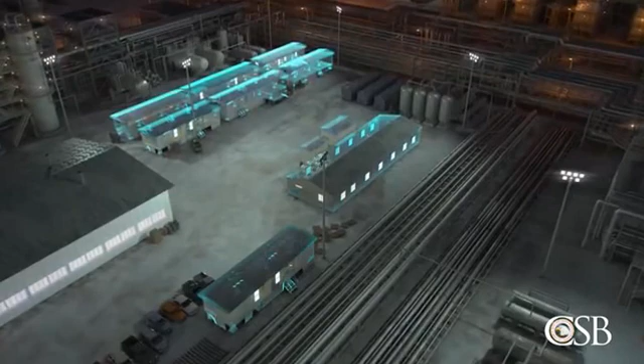BP had positioned a number of portable trailers close to process units for the use of contractors and other maintenance workers. Over a period of months, BP had located 10 trailers for workers servicing the Ultra Cracker unit, including a double-wide wood-framed trailer that contained 11 offices and was regularly used for meetings. Though these trailers were located near the isomerization unit, the occupants were not warned the ISOM unit was about to start up, a potentially hazardous operation.

At 2:15 a.m. on March 23rd, overnight operators began introducing flammable liquid hydrocarbons, known as raffinate, into a 170-foot-tall raffinate splitter tower used to distill and separate gasoline components.

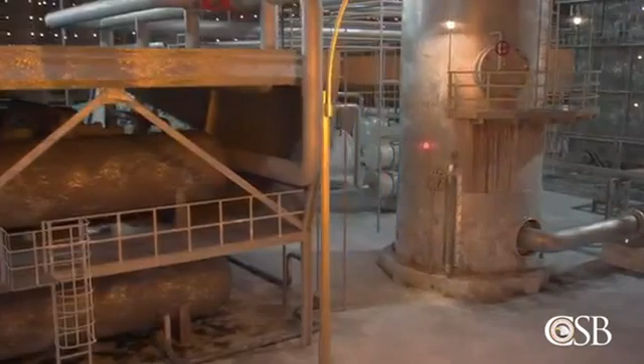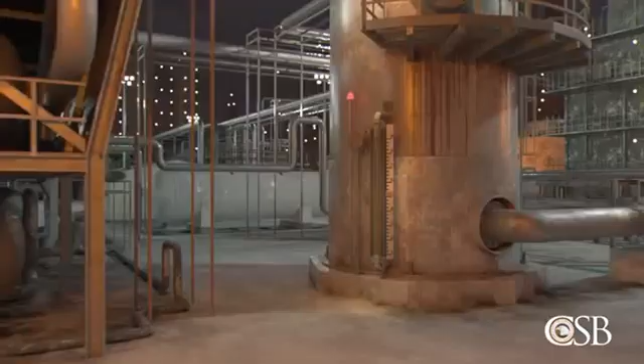Near the base of the tower, there was a single instrument that measured how much liquid was inside. It transmitted this information to both a satellite control room and a central control room located away from the ISOM unit. But this level indicator was not designed to measure liquid above the 9-foot mark. During normal operation, the tower was only supposed to contain about 6½ feet of liquid.

But during startups, operators routinely deviated from written procedures and filled the tower above the 9-foot mark, concerned that if the liquid level fluctuated too low, it would cause costly damage to the furnace.

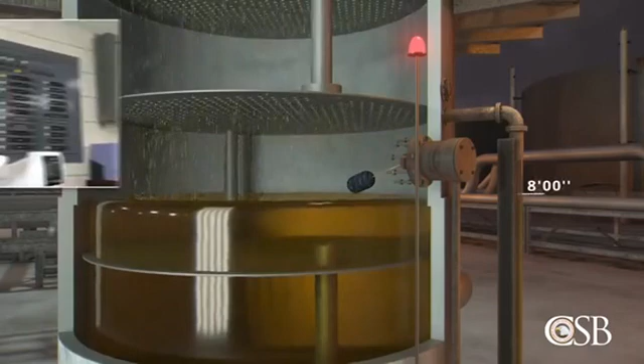At 3:09 a.m., as the liquid neared the 8-foot mark, a high-level alarm activated and sounded in the control rooms. But a second high-level alarm, slightly further up the tower, failed to go off.

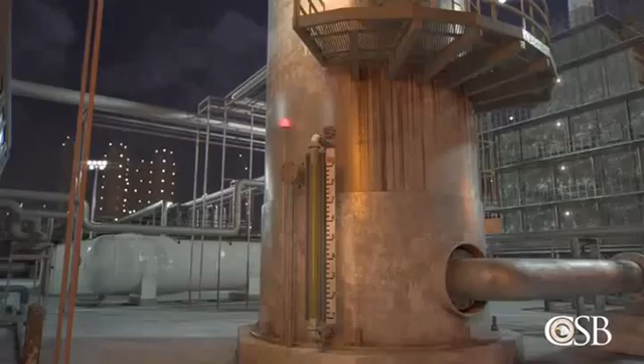By 3:30 a.m., the level indicator showed that liquid had filled the bottom 9 feet of the tower and the feed was stopped. The CSB later estimated that the liquid was in fact at a height of 13 feet, but operators could not know the actual level because the indicator only measured up to 9 feet.

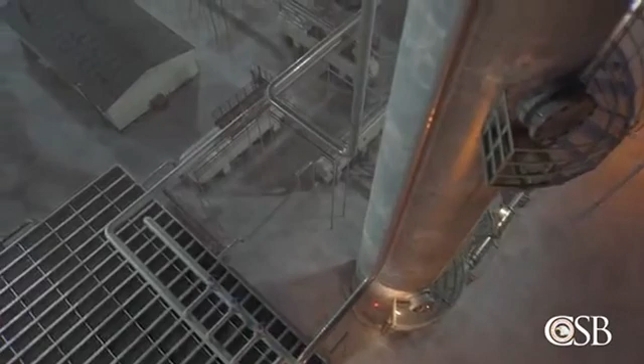The lead operator had been overseeing the startup from a satellite control room within the ISOM unit. At 5 a.m., he briefly updated the night board operator in the central control room about the startup activities. The lead operator then left the refinery early, an hour before the end of the shift.

A new board operator arrived in the control room around 6 a.m. to start his 30th day in a row working a 12-hour shift. He spoke briefly with the departing night shift operator and then read the logbook to prepare for the startup.

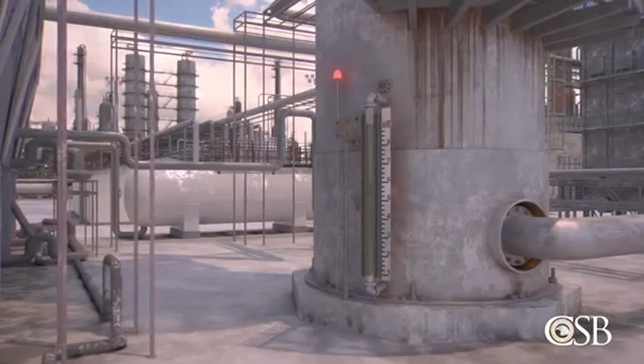But the logbook did not clearly indicate how much liquid was already in the tower and equipment, and it left no instructions on routing of the liquid feed and products when the startup resumed. Instead, the control board operator only found a one-line logbook entry that said ISOM brought in some RAF to unit to pack RAF with. At 7:15 a.m., the day shift supervisor arrived.

Because he was more than an hour late, he received no formal briefing from personnel on the night shift about conditions in the ISOM unit.

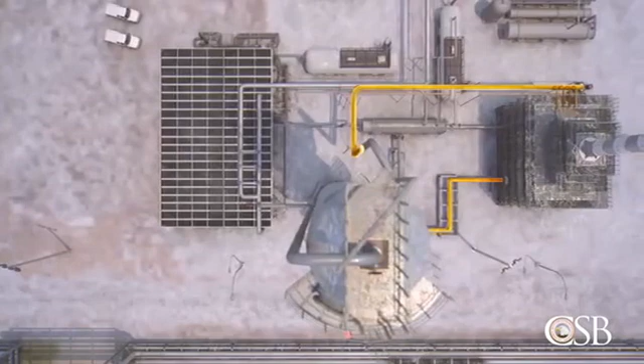At 9:51 a.m., operators resumed the startup. They began recirculating the liquid feed and adding more liquid to the already overfilled tower.

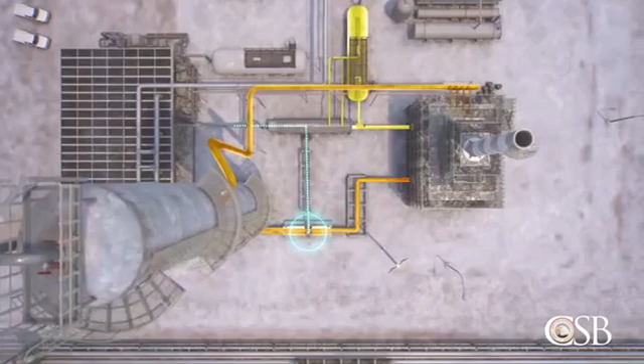As new feed was added, startup procedures called for regulating the liquid level in the tower using the automatic level control valve. But the board operator and others had received conflicting instructions on routing the product. As a result, this critical valve was left closed for several hours, blocking the flow of liquid from the tower.

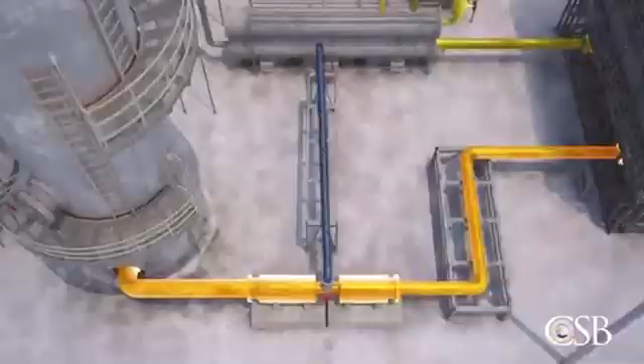A few minutes later, operators lit burners on the furnace to begin heating up the feed, part of the normal startup process. While the startup was underway, the day supervisor left the refinery on short notice, just before 11 a.m., to attend to a family medical emergency.

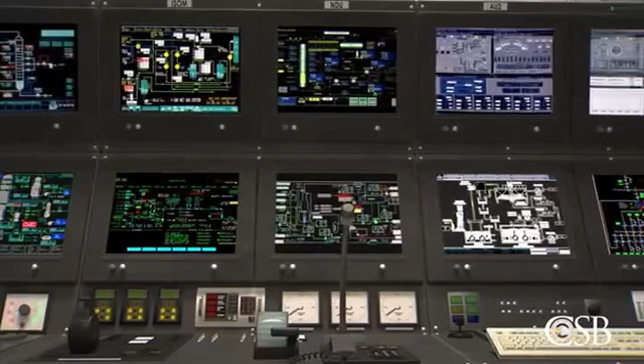Contrary to BP's own procedures, no experienced supervisor was assigned to replace him. This left a single control board operator, now without a qualified supervisor, to run 3 refinery units, including the ISOM unit, which needed close attention.

The refinery had eliminated a second board operator position following corporate budget cuts in 1999 after BP acquired Amoco.

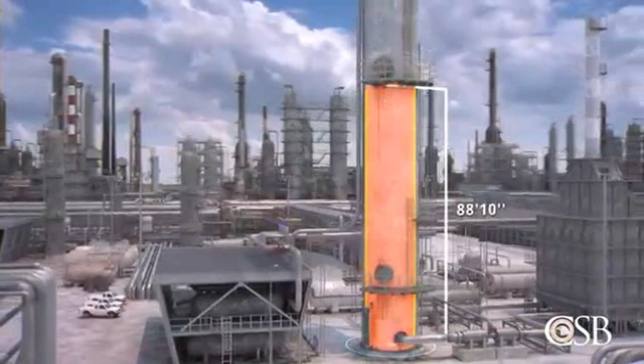As the startup continued, the tower steadily filled with liquid, reaching a height of 98 feet shortly before noon, more than 15 times the normal level. But the improperly calibrated level indicator told operators in the control room that the liquid was at 8.4 feet and gradually falling.

Furthermore, the control panel was not configured to clearly warn operators of the growing danger. It did not display flows into and out of the tower on the same screen, nor did it calculate the total liquid in the tower.

Meanwhile, the maintenance contractors, who were not involved in the operation of the ISOM unit, left their work trailers to attend a company lunch, celebrating a month without a lost time injury.

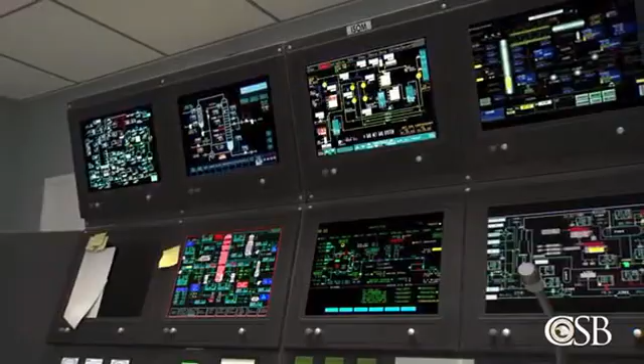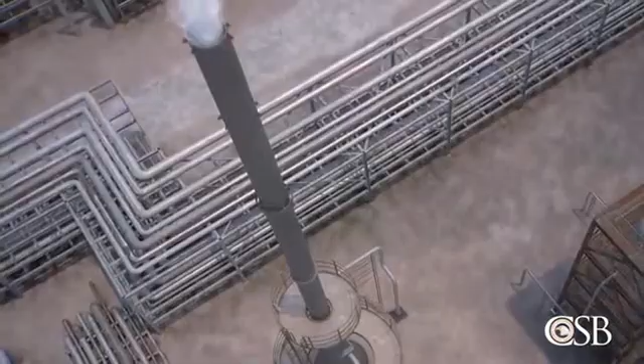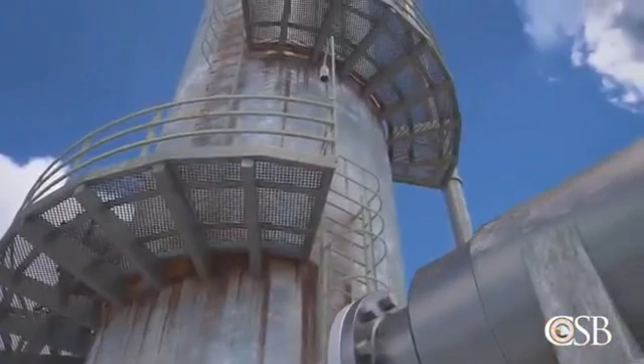At 12:41 p.m., an alarm activated as the rising liquid compressed the gases remaining in the top of the tower. Unable to understand the source of the high pressure, operators opened a manual chain valve to vent gases to the unit's emergency relief system, a 1950s-era blowdown drum that vented vapor directly into the atmosphere. Operators also turned off 2 burners in the furnace to lower the temperature inside the tower, believing this would reduce the pressure. Nobody knew the tower was dangerously full.

The operators did become concerned about the lack of flow out of the tower and began opening the valve to send liquid from the bottom of the tower to storage tanks. But this liquid was very hot. As it flowed through the heat exchanger, it suddenly raised the temperature of the liquid entering high up the tower by 141 degrees Fahrenheit. It was now about 1 p.m.

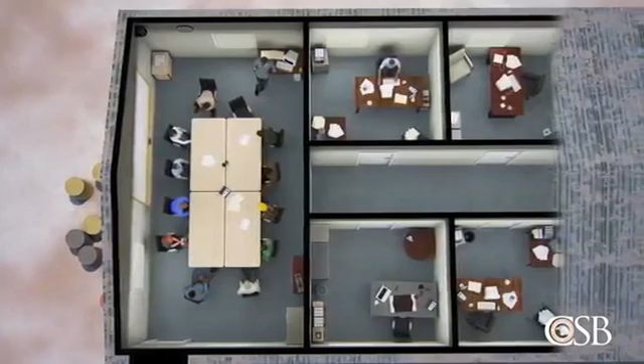Contract workers, unaware of the startup and the looming danger, returned from lunch and began a meeting in the double-wide trailer, in the corner room closest to the blowdown drum.

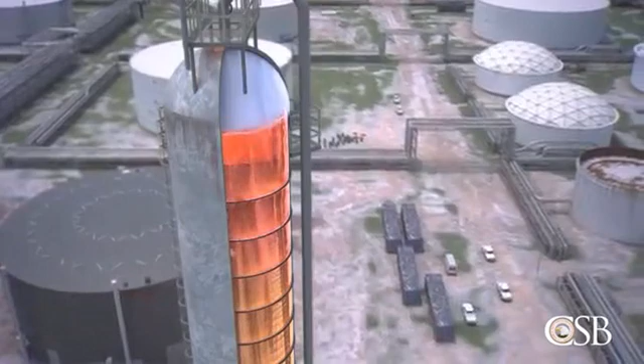Over the next few minutes, the hot feed entering the tower caused the liquid inside to start to boil and swell. Liquid filled the tower completely and began spilling into the overhead vapor line, exerting great pressure on the emergency relief valves 150 feet below.

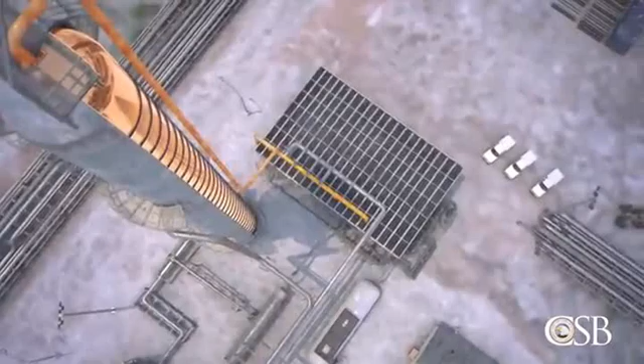At 1:14 p.m., the 3 emergency valves opened, sending nearly 52,000 gallons of flammable liquid to the blowdown drum at the other end of the ISOM unit. Liquid rose inside the blowdown drum and overflowed into a process sewer, setting off alarms in the control room. But the high-level alarm on the blowdown drum failed to go off. None of the operators knew of the catastrophe unfolding in the ISOM unit.

As flammable hydrocarbons overfilled the blowdown drum, operators nearby saw a geyser of liquid and vapor erupt from the top of the stack. The equivalent of nearly a tanker truck full of hot gasoline fell to the ground and began forming a huge flammable vapor cloud.

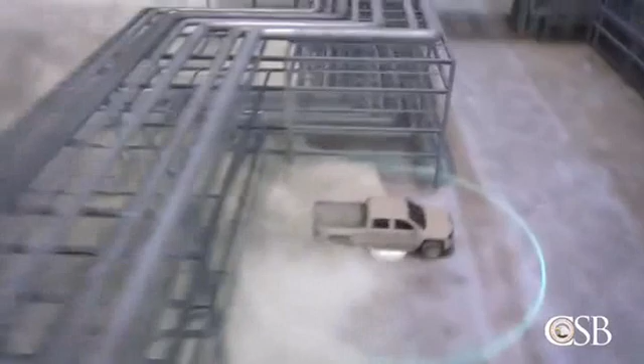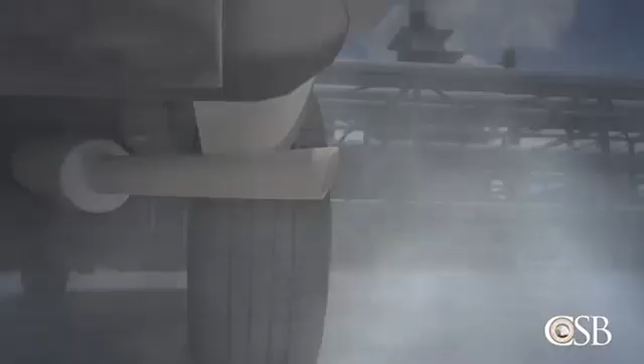The vapor cloud expanded in just 90 seconds, engulfing the unit and the nearby trailers full of workers. About 25 feet from the base of the blowdown drum, 2 workers were parked in a pickup truck with the engine idling. As flammable vapor entered the air intake, the diesel engine began to race. The 2 workers fled, unable to shut off the engine. Moments later, witnesses saw the truck backfire and ignite the vapor cloud.

Powerful explosions swept through the area. The blast pressure wave accelerated through the ISOM unit, causing heavy destruction and igniting fires. The workers inside the trailers were right in the path of the explosions. The fires continued to burn for hours.

12 of the 20 occupants of the double-wide trailer were killed, along with 3 workers in a trailer nearby. 180 workers were injured, many with serious burns, fractures, or other traumatic injuries. The wood and metal frame trailers were blown apart by the blasts. Firefighters struggled to rescue the injured and recover the victims. 50 large chemical storage tanks were damaged, and the ISOM unit remained shut down for more than 2 years.

The disaster at BP Texas City was the most serious refinery accident ever investigated by the CSB. CSB Supervisory Investigator Don Holmstrom led a 2-year investigation to determine the root causes of the accident. This investigation was the largest and most comprehensive investigation in the history of the Chemical Safety Board.

We interviewed over 370 witnesses. We looked at thousands of documents, literally millions of pages of documents, and we examined the plant, inspected over 40 pieces of instrumentation and equipment.

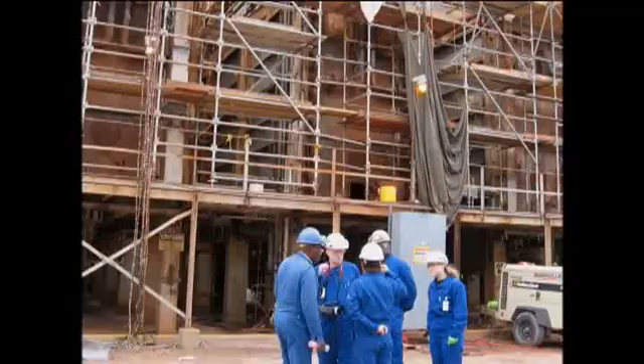The investigation team examined a wide range of safety systems, practices, and standards, and looked at human factors such as fatigue and communication between operators.

The tragedy at BP was the worst industrial accident in the United States in nearly 15 years. The CSB concluded that it was the result of organizational and safety deficiencies at all levels of the company. We found that BP management had, for many years, overlooked warning signs of a possible catastrophic accident.

There's an old saying that if you think safety is expensive, try an accident. Accidents cost a lot of money, and they're not only in damage to plant and in claims for injury, but also in the loss of the company's reputation.

The reason why the Texas City accident has such an impact is because when people look at it, they can see that they are all in the same boat, that the problems which led to that accident are likely to be present at other sites around the world.

During the early stages of our investigation, our team had noted there were multiple safety system deficiencies at the Texas City plant. We also found there was a history of fatalities at the plant.

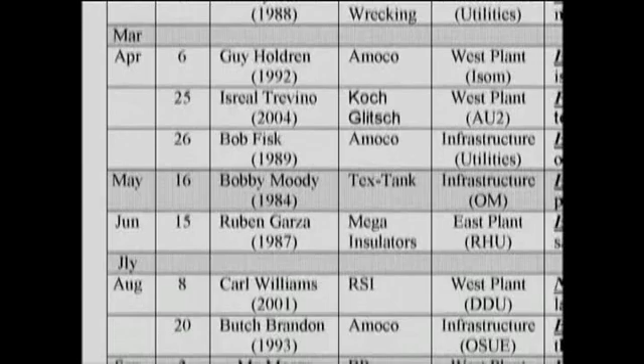Prior to the March 2005 accident, 23 people died in accidents over a 30-year period at the Texas City Refinery, beginning when it was owned by Amoco and continuing after BP acquired the refinery in 1999.

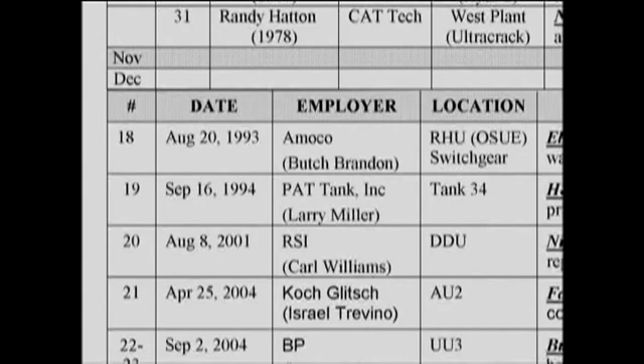The CSB wanted to know what the connection was between this history of fatal incidents and the organizational and cultural factors. BP Corporation's lack of focus on preventing major accidents allowed budget cuts to be made without assessing the impact on process safety. The CSB found that cost-cutting, production pressures, and failure to invest significantly impacted the process safety performance at the Texas City Refinery and left the refinery vulnerable to catastrophe.

After the merger with Amoco, BP ordered a 25% reduction in fixed costs at all its refineries. This impacted important process safety systems such as staffing, training, and mechanical integrity.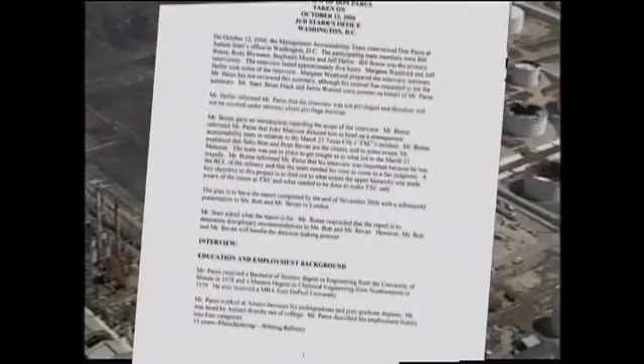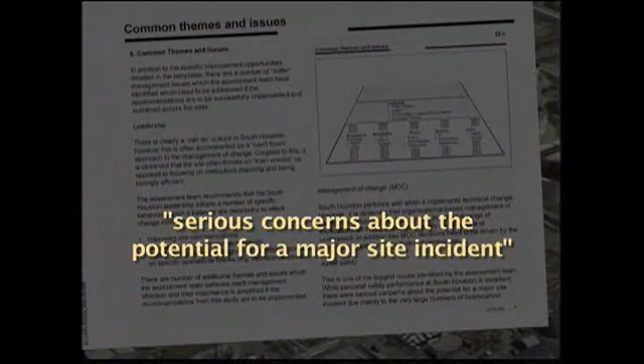The effects of the budget cuts became apparent in a number of internal BP documents made public following the accident. In one, the refinery manager was quoted as having observed in 2002 that the infrastructure at Texas City was in complete decline. He ordered a study of the refinery's safety and mechanical integrity, which was shown to BP executives in London. That study warned of serious concerns about the potential for a major site incident following more than 80 hydrocarbon releases in the previous 2 years.

The study also concluded that its own findings were urgent and far-reaching. A follow-up BP study in 2002 found the refinery's integrity and reliability issues were clearly linked to the reduction in maintenance spend over the last decade.

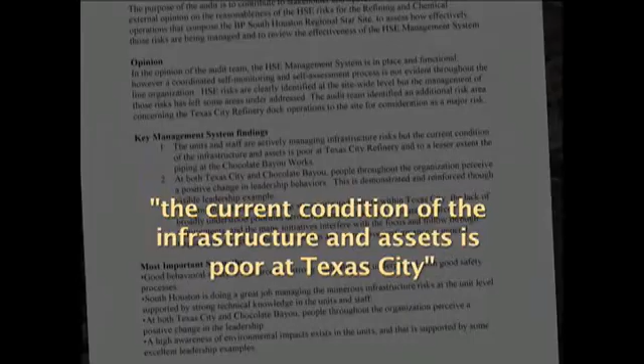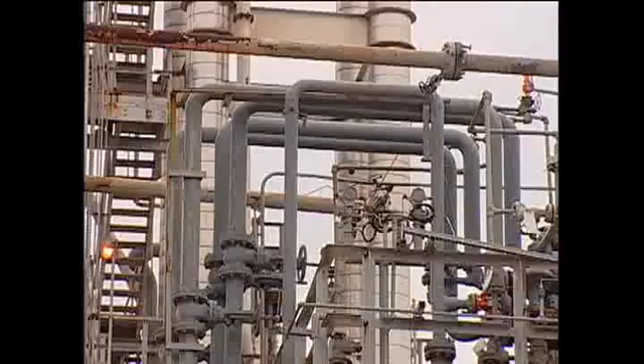In 2003, a maintenance assessment stated that cost-cutting measures have interfered with the group's work to get things right. Usually, reliability improvements are cut. Later that year, a company audit found the current condition of the infrastructure and assets is poor at Texas City, and that maintenance spending was limited by a checkbook mentality. Only the money on hand would be spent, rather than increasing the budget.

In March 2004, BP auditors in London concluded that 35 business units around the world, including the Texas City Refinery, suffered from a host of common safety problems, including widespread tolerance of non-compliance with basic HSE, or health, safety, and environmental rules, poor implementation of safety management systems, and lack of leadership competence and understanding.

There were a number of reports coming up as high as the board level that indicated serious problems throughout the BP system. During 2004, the Texas City Refinery had 3 major accidents, including a process unit fire that caused $30 million in damage. 2 other accidents in 2004 resulted in 3 fatalities. Yet this same year, the refinery had its lowest ever recordable injury rate, a statistic that does not include fatalities.

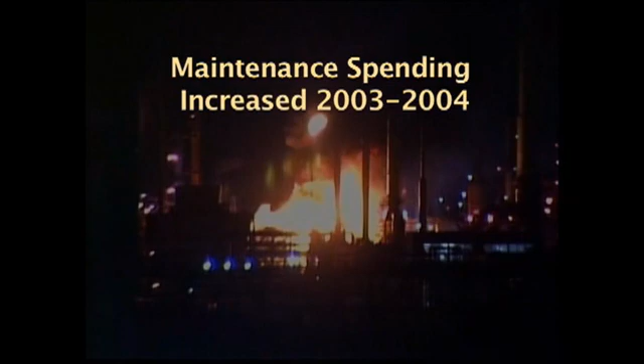The CSB found that maintenance spending increased between 2003 and 2004. But most of the increases were for responding to serious accidents and complying with environmental requirements, not for preventive maintenance.

Late in 2004, the Texas City Refinery manager made a presentation to supervisors titled 'Safety Reality,' reviewing fatalities at the plant over the past 30 years. One of the slides was entitled, 'Texas City is not a safe place to work.'

BP did its own safety culture survey just prior to the accident. That survey indicated there was an exceptional degree of fear among employees of a major catastrophe. Among the findings: the pressure for production, time pressure, and understaffing are the major causes of accidents at Texas City. Critical events, like failures or breakdowns, are generally not attended to. Production and budget compliance gets recognized and rewarded above anything else.

Sociology professor Dr. Andrew Hopkins has written extensively on the causes of industrial disasters. My feeling is that the solution to this problem of cost-cutting by senior people is to hold them responsible for the safety implications of those cost cuts, so that when they order a cost cut, they should personally be able to certify that these things will not have adverse safety consequences.

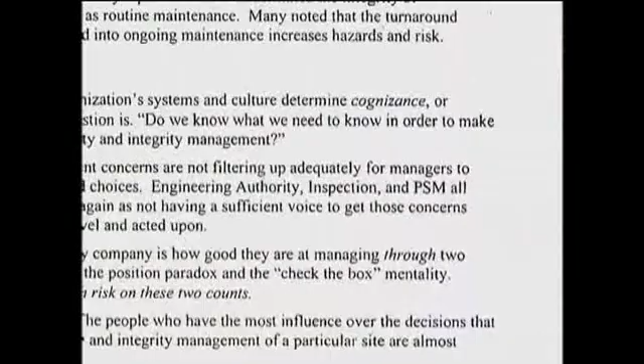The survey of Texas City employees also found concern about safety and equipment checks potentially left undone. There was a check-the-box mentality, which indicated that personnel would go through the motions with various policies and procedures, but the work would not be conducted.

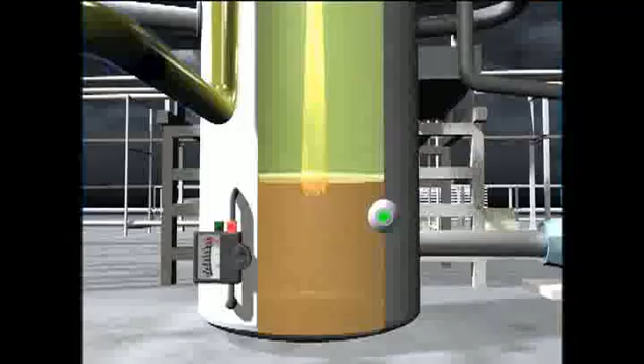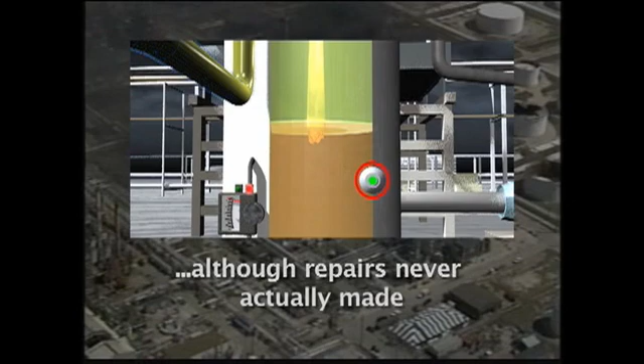For example, the tower high-level alarm had been reported as not functioning several times in the 2 years prior to the accident. But maintenance work orders for this alarm were closed, although the repairs were never actually made. Work orders could be closed out as completed, even though the work hadn't been performed.

This is important because we found that on the day of the incident during the ISOM startup, there were a number of instruments and equipment that were not functioning properly. On February 20th, 2005, a company safety manager wrote, "I truly believe we are on the verge of something bigger happening." Then, 3 weeks later, a BP business plan recognized a number of key safety risks, including that Texas City site kills someone in the next 12 to 18 months. 8 days later, those fears were realized.

Here were these warnings. These audits were sounding very clear warnings. So why weren't they attended to? I think my feeling is that Texas City was virtually paralyzed by the cost-cutting which had occurred at that site, and they were simply unable to respond to those warnings.

There needs to be somebody on the board of directors who can interpret those reports and be in position to drive change effectively. The CSB's final report recommended that BP appoint an additional non-executive member of the board of directors with specific expertise in refinery operations and process safety.

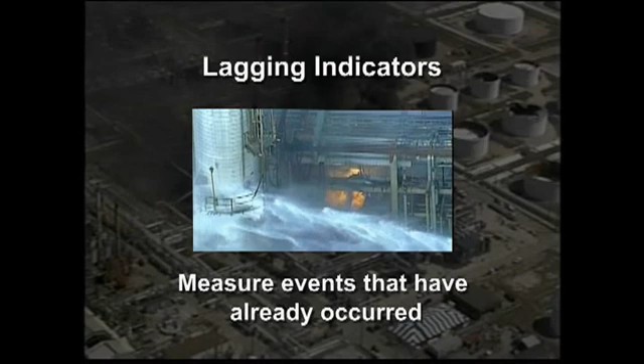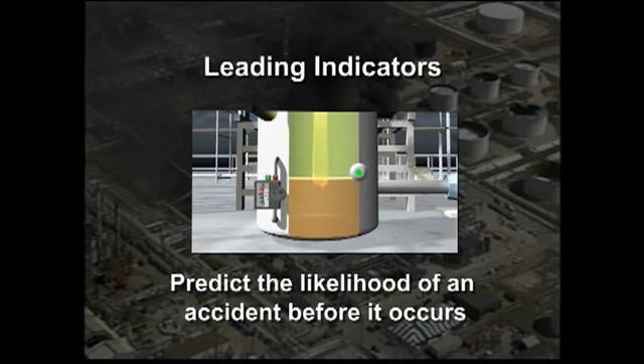You need to measure process safety performance with the appropriate indicators, both leading and lagging indicators. Lagging indicators measure events that have already occurred, such as fires, explosions, and equipment failures. Leading indicators are designed to predict the likelihood of an accident before it occurs. For example, the percentage of equipment inspections that are overdue. The opening of a safety release pressure relief valve is itself an indicator that things are not as they should be. So we should count those and try and reduce the number of occurrences of those sorts of events.

But the investigation found that BP did not effectively use leading and lagging indicators to measure and drive process safety performance. For example, BP's pay plan rewarded managers primarily for controlling costs. The only safety metric used to calculate bonuses was the personal injury rate. Process safety was not considered.

The CSB final report recommended that the United Steelworkers Union and the American Petroleum Institute create a new standard for process safety indicators for the petrochemical industry. The board also called on BP to use leading and lagging indicators to strengthen refinery safety performance.

After an accident, managers often say, "I didn't know this was happening," or not happening, as the case may be. "If I'd known, I'd have stopped it." Now, this is bad management. It's the manager's job to know what is going on. And he can do that by going round and by keeping his eyes open and reading the accident reports in detail. The CSB investigation noted that BP ignored numerous warnings of the potential for a catastrophic accident, a result of not having an effective reporting and learning culture.

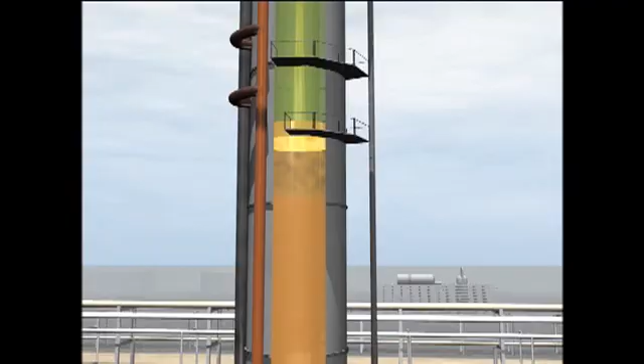For example, BP wasn't investigating abnormal conditions that were occurring repeatedly during startups of the ISOM unit. The CSB examined 19 previous startups in the 5 years prior to the ISOM incident, and found that in the vast majority of these startups, the operators ran a high level above the range of the level transmitter. The problem with running the level above the reading is that you don't know how high the level really is. This can lead to grossly overfilling the tower.

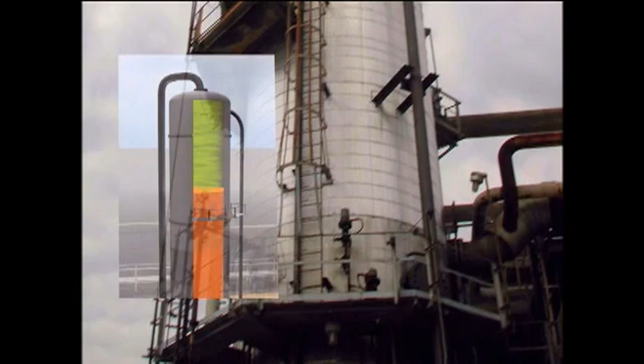But even though high levels and pressures could have led to a catastrophic accident, the previous startups were never investigated as near misses, and procedural deviations became accepted as normal. The CSB investigation also found 8 serious releases of flammable vapor from the ISOM blowdown drum, 2 of which caught fire between 1994 and 2004. Only 3 of the incidents were ever investigated.

It's widely recognized now that you should investigate near misses, or really near accidents, as thoroughly as you investigate accidents. After all, it's only a matter of luck whether a leak of flammable liquid or gas catches fire or not. In our final report, the CSB recommended that BP's Board of Directors establish a system to encourage reporting of incidents without fear of retaliation, to investigate and implement prompt corrective actions, and to communicate lessons throughout the company.

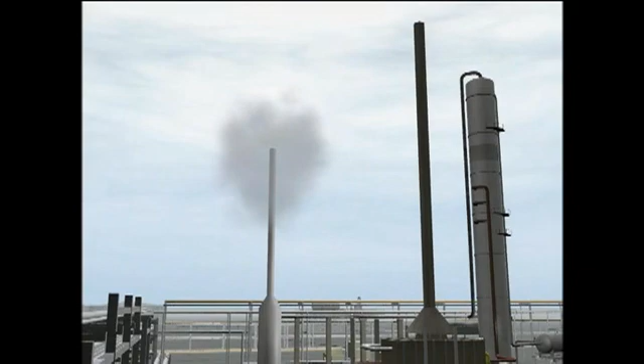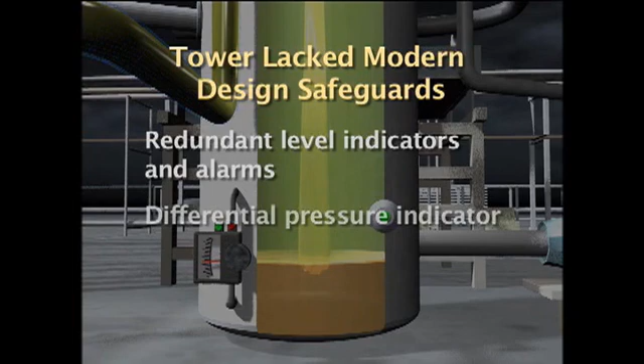The first choice after an accident is to say, how can we improve the design so this can't happen? How can we remove the opportunity for errors? Even as releases occurred over many years in the ISOM unit, BP continued using equipment based on outdated designs. The raffinate splitter tower lacked modern design safeguards, such as redundant level indicators and alarms, a differential pressure indicator, and automatic interlocks to prevent overfilling. In a well-designed plant, a simple error like closing the wrong valve shouldn't result in an accident.

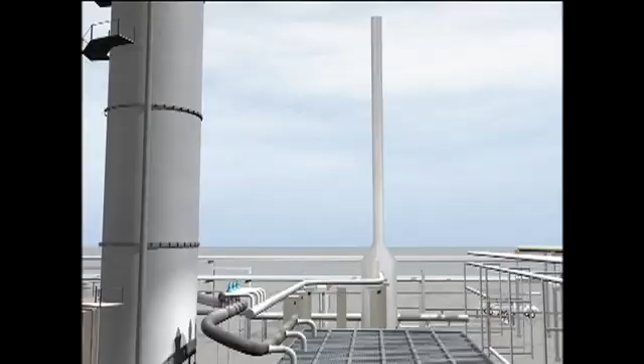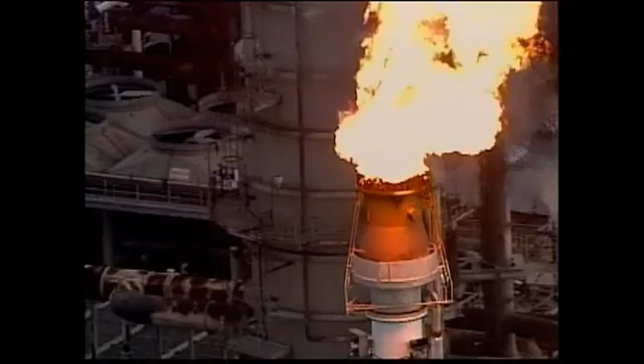The design of the emergency pressure relief system was also outdated. Relief valves vented hydrocarbons directly to the atmosphere through an antiquated blowdown drum, which was first installed in the 1950s. The CSB report said the hydrocarbons should have been routed to an inherently safer disposal system, such as a flare, to contain the hydrocarbon liquid and burn off flammable vapor.

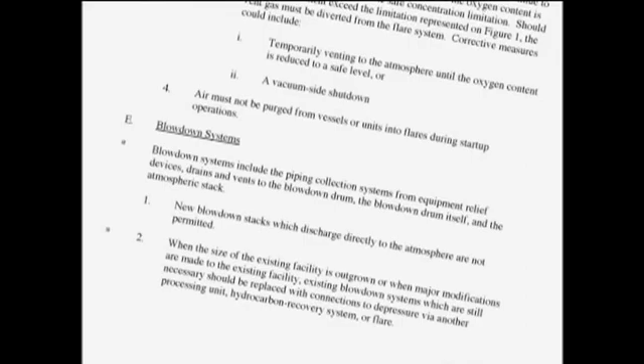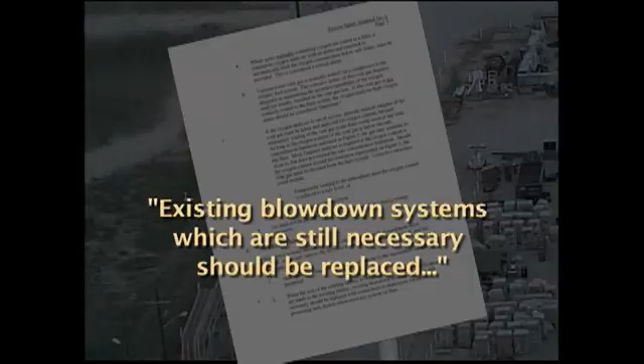In fact, the investigation found that Amoco's own safety standards, later adopted by BP, stated that new blowdown stacks which discharge directly to the atmosphere are not permitted. As facilities were upgraded, existing blowdown systems which are still necessary should be replaced. On several occasions prior to the incident, BP had seriously considered connecting a flare to the ISOM unit. In the early 1990s, when Amoco owned the refinery, 3 proposals were made to replace blowdown stacks at Texas City. 2 more proposals were made in 2002, after the merger with BP. However, these decisions were impacted by production pressures and budget cuts, and the flare was never constructed.

In 1992, OSHA conducted an inspection at the Texas City Refinery because there had been a release from a very similar blowdown drum in a different process unit. OSHA cited the then Amoco refinery for the unsafe blowdown system. OSHA determined that the design of the blowdown drum was unsafe because it relieved to atmosphere, not to a safe place. But OSHA later withdrew the citation after Amoco asserted the equipment conformed to American Petroleum Institute standards.

In October 2006, the board issued a recommendation to the American Petroleum Institute calling for new guidelines that warn against the use of blowdown drums similar to those found in Texas City. We also recommended that OSHA implement a national emphasis program for all oil refineries focused on the hazards of blowdown drums that release to the atmosphere. Whenever possible, companies should use inherently safer systems, such as flares, instead of blowdown drums.

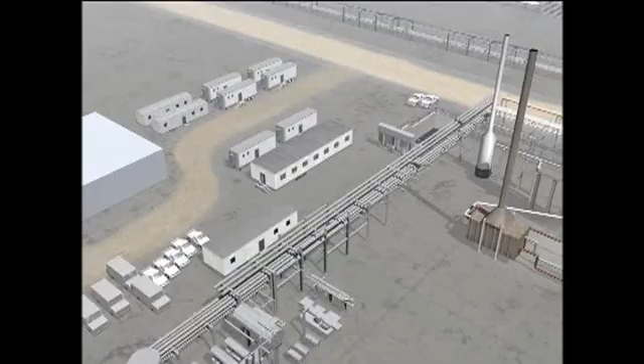The presence of occupied trailers near the blowdown stack added to the hazards of venting flammable material to the atmosphere. Prior to the incident and prior to the startup of the ISOM unit, a number of occupied trailers had been placed close to the ISOM unit. These trailers were occupied by workers who were not involved in the turnaround activities in the ISOM unit. The investigation found this was a key factor leading to the deaths of the workers.

They were right on top of the process, in trailers as close as 120 feet from the blowdown drum, which is right at the edge of the isomerization process. CSB investigator Mark Kaszniak: It is not safe to have trailers that close to a blowdown drum or at the edge of an active process in a petroleum refinery.

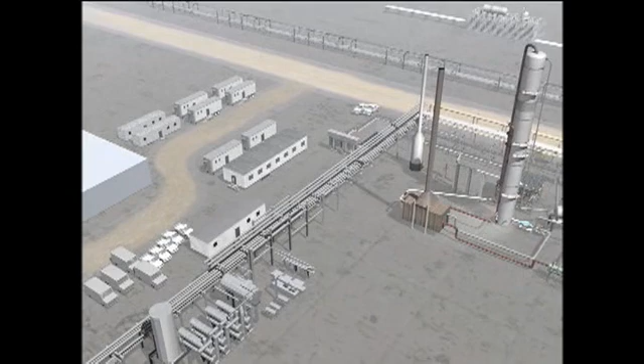During an explosion in a refinery, you're actually safer in the open atmosphere than if you were working inside of a trailer. This is because the explosion overpressure will destroy the weak trailer construction, resulting in the formation of missiles and walls collapsing, which is potentially fatal to the occupants.

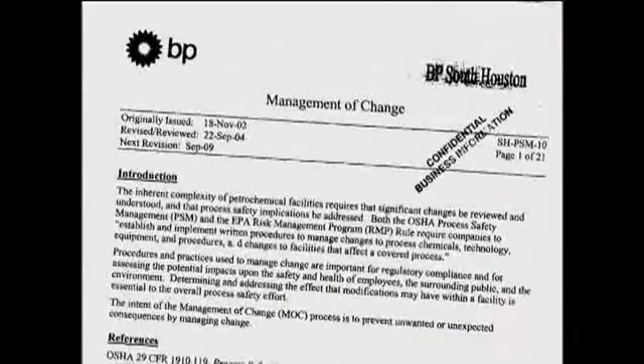The CSB determined that industry siting guidelines did not adequately protect trailer occupants from the fire and blast damage that can occur hundreds of feet from an explosion like the one at BP. We found that these guidelines were not safe enough prior to this accident and resulted in placing people in harm's way. In addition, BP did not follow its own management of change procedures before placing most of the trailers in a dangerous location. They did not assess the blast hazards posed to the trailers, and action items created during the review were never followed up and corrected.

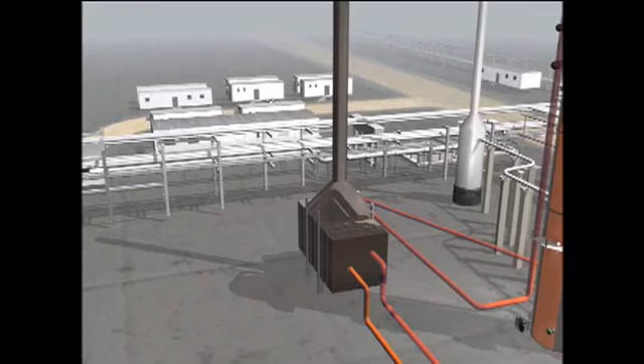Ultimately, the decision on where to place the trailers was largely based on convenience, not safety. And contrary to BP startup procedures, on the morning of March 23rd, managers did not remove personnel from the nearby trailers or even alert them that the potentially hazardous startup was taking place.

The explosion totally destroyed 13 trailers and damaged 27 others, some as far away as 1,000 feet. People inside trailers as far away as 479 feet were injured.

In October 2005, the CSB issued an urgent recommendation to the American Petroleum Institute to revise industry standards and establish minimum safe distances for occupied trailers away from hazardous process areas. On June 21, 2007, the American Petroleum Institute issued new industry guidelines to minimize the presence of people and occupied trailers in hazardous process areas.

For a long time, people were saying that most accidents were due to human error. And this is true in a sense, but it's not very helpful. It's a bit like saying that falls are due to gravity. There were a number of human errors that contributed to the overfilling of the tower and the disaster that followed at Texas City. No one shows up to work planning to make mistakes.

So we looked at the conditions in the workplace that would make error more likely. You really need to look at why the operators did what they did. CSB Human Factors Specialist Cheryl MacKenzie: There were a number of human factors issues involved with this incident, including fatigue of the workers, insufficient training, and procedural deviations that occurred during the startup.

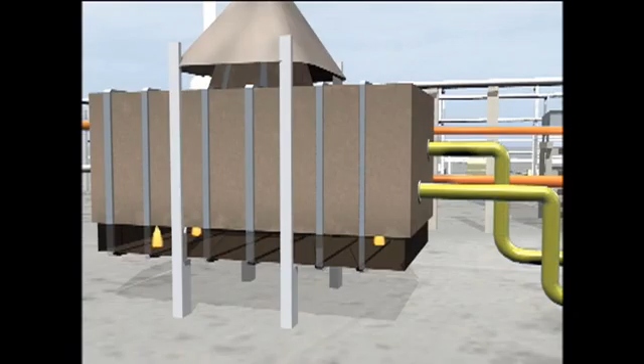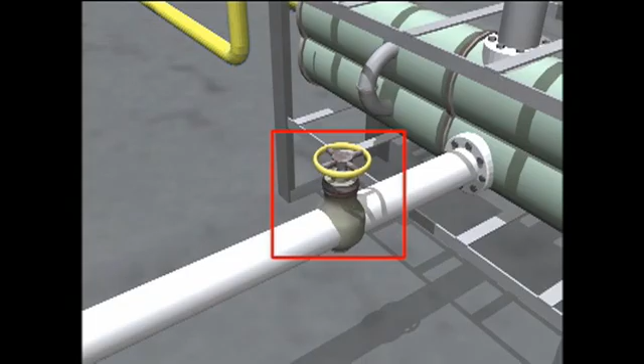The investigation found that operators were concerned that if they let the liquid level in the tower get too low during startups, it would damage the furnace. So they had adopted an informal procedure of adding extra liquid to the tower during startup. To do this, they placed the level control valve in manual, not the automatic mode required by procedures, and left the valve closed to raise the liquid above the recommended 6.5-foot level.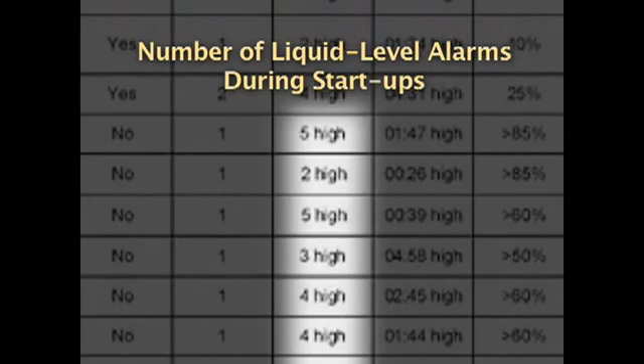So routine had this practice become, the CSB found that the tower's high-level alarm had activated 65 times during the previous 19 startups. The outdated operating procedures for the unit did not establish any safe upper limit for the liquid level in the tower. Unknown to operators, regularly overfilling the tower had serious risks.

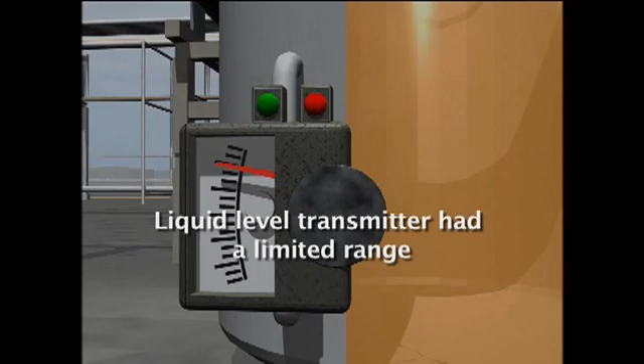The tower's liquid level transmitter had a limited range, and should the liquid rise above the maximum reading of 9 feet, operators could not know if the tower was dangerously overfilling. This informal practice of running the level in the raffinate splitter tower above the range of the transmitter led to running blind. They weren't aware of the dangers of overfilling the column, and so they tended to err on the side of what they saw as caution by overfilling the column.

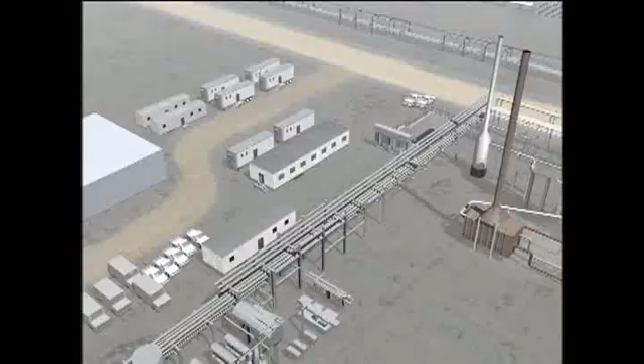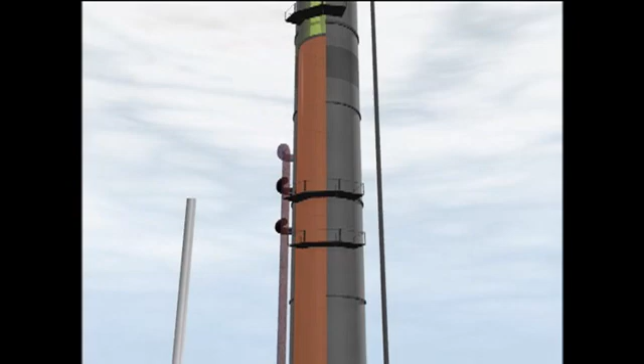Their systematic deviation from what they should have been doing was actually well-intentioned. It was with the interests of the company at heart that they were violating the startup procedures. But on the day of the accident, the routine deviation, overfilling the tower above the range of the indicator, coincided with a number of instrument failures, which impaired the board operator's decision-making. This had tragic results, as the board operator lost awareness of just how high the level was.

The tower level indicator had been calibrated for years based on 1975 data for a different liquid used in a different process. As a result of the miscalibration, the indicator showed the level in the tower was declining just prior to the explosion, when it was actually increasing. And a backup high-level alarm on the tower failed to activate, seeming to confirm that the liquid level was dropping.

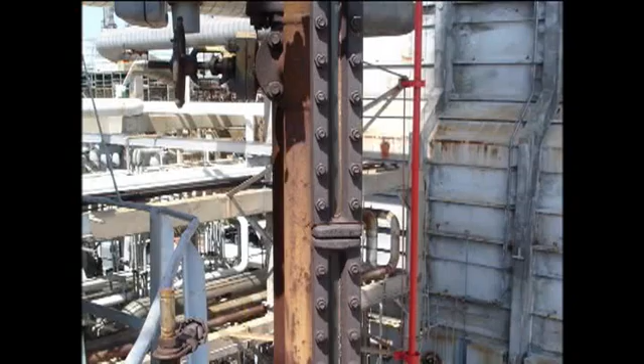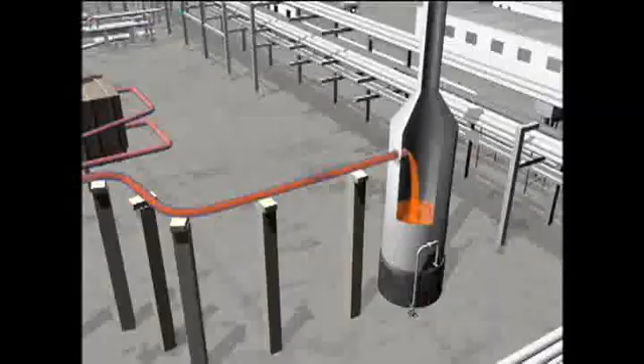A sight glass on the tower was dirty and unreadable and could not be used to visually check the liquid level. The investigation concluded that the board operator truly had no functional and accurate measure of the tower level on March 23, 2005. And when the liquid finally did spill over into the blowdown drum, the high-level alarm there failed to go off. BP procedures required that alarms and instruments and other equipment be checked for their functionality prior to startup.

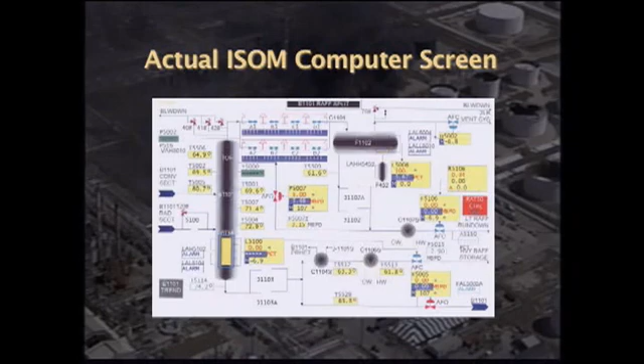The CSB determined that these checks were largely not performed. A poorly designed computer display in the control room added to the difficulty of determining if the splitter tower was overfilling. Liquid flows into and out of the tower were not shown on the same screen, even though the computer could have been configured to do so.

The investigation also found that communication problems among BP personnel during the morning of the startup increased the likelihood of errors. Operators received contradictory instructions on where to send the products from the tower, and the day shift operators never got clear information from the night shift about how much liquid the tower already contained.

The board operator and the other operators that came in during the day shift really didn't understand what had occurred the night before. So they're starting up this unit without full knowledge of the state of the unit, and they're making judgments and decisions based on incomplete information.

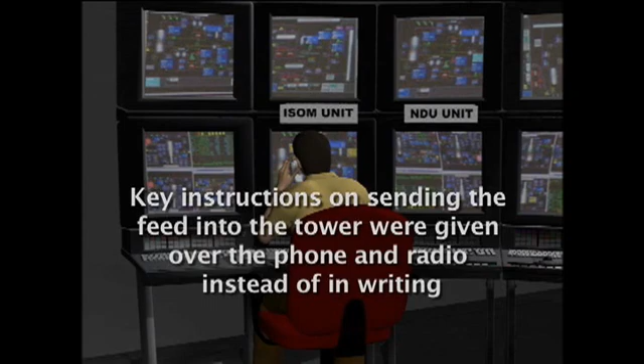The investigation found that BP lacked adequate policies and a management emphasis on effective communications. Key instructions on sending the feed into the tower were given over the phone and radio instead of in writing. Operators later told investigators these verbal communications were rushed and vague. Written communications in the logbook were brief and unclear.

Night shift operators did not conduct a crucial face-to-face meeting to brief day shift operators on the conditions in the unit. Therefore, they didn't realize how much liquid was in the tower and the equipment, so they added more, which led to the subsequent overfilling of the tower, which later led to the release. The opportunities for human error were multiplied by the lack of adequate supervision, staffing, and training at the refinery.

Training had been downsized, and that training was largely delivered through computerized means rather than face-to-face training. BP did not train operators on the hazards of overfilling towers, and training for abnormal situations was insufficient. Despite recommendations dating back 5 years, simulators were not used to train board operators on making critical decisions.

As noted in an internal BP email about simulators 3 weeks after the accident, big pushback has always been initial cost. Budget pressures also impacted control room staffing. BP implemented a 25% cost reduction in '99. During the same time period, BP downsized the board operators in the ISOM unit from 2 to 1.

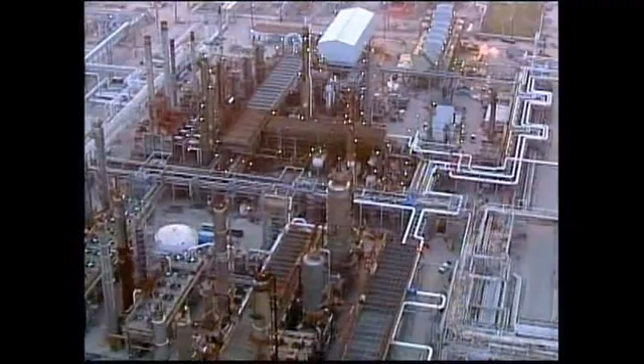Later, BP added an additional process unit to the responsibilities of the board operator in the ISOM unit. The result was that you had 3 complex refinery units under the supervision of one board operator. According to BP's own assessment, even under normal conditions, monitoring and controlling these 3 units would require 10.5 hours of the board operator's 12-hour shift.

But the startup of the ISOM unit would demand significantly more time and attention from the operator, whose workload was already nearly full. And when the startup began to encounter problems late that morning, supervisory oversight of the board operator was absent. BP's own policies required that a supervisor or technically trained person be present during startup because it's an especially hazardous period. The supervisor who showed up on March 23rd left due to a family emergency, and there was no replacement. Finally, investigators looked at the role operator fatigue played as a human factor contributing to the accident.

Fatigue can affect performance in many ways. It can cloud decision-making, it can delay responses to actions on a control board, and it can lead an operator to miss out on what's going on overall in a unit.

Fatigue can impair judgment. It can lead an operator to fixate on one operational parameter, such as the declining level, and lose track of other factors, such as liquid being added to the tower for 3 hours and no liquid being removed.

ISOM unit operators had been working 12-hour shifts for at least 29 days prior to the accident. In particular, the board operator was likely suffering from fatigue, including acute sleep loss and a cumulative sleep debt of more than 43 hours.

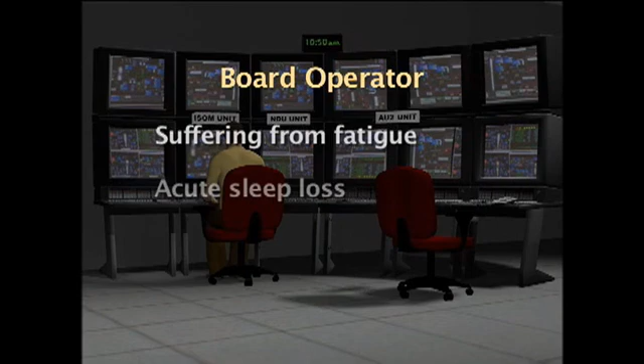We determined that BP had no fatigue prevention policy, and in fact, there was no fatigue prevention policy in the industry as a whole.

Companies and employees may believe they benefit from overtime schedules, particularly during maintenance turnarounds, but operator fatigue can have deadly consequences.

Our final report recommended that the United Steelworkers and the American Petroleum Institute develop new guidance on preventing fatigue in the petrochemical industry, including limits on hours and days at work.

I participated in the panel because I lost a near and dear friend in this incident. A personal friend of mine was killed in this incident. And I thought it was very important that the management systems be looked at with a fresh set of eyes.

Early in the investigation of the Texas City accident, the CSB observed what appeared to be a pattern of safety deficiencies. We therefore issued an urgent recommendation, the first ever by this agency, that BP convene an independent panel of experts to study the safety culture of its 5 North American refineries.

In October 2005, BP established an 11-member panel that included leading industry, labor, and academic safety experts. It was headed by former Secretary of State James A. Baker III.